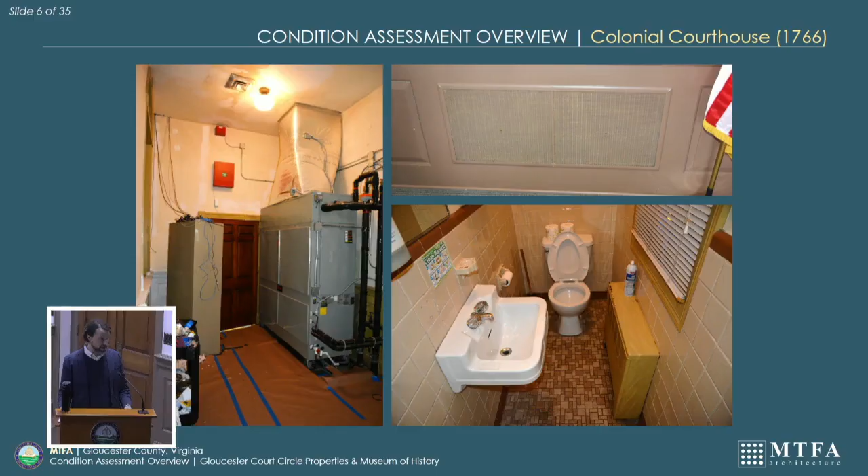And then the big question, which I've kind of hinted at, is what period does this building want to be restored to in a future renovation or restoration? We've had lots of debate. It's called the Colonial Courthouse, but there were serious major renovation periods that in some ways have removed significant aspects of that colonial fabric. So really much of what we see is a combination of 1766, 1907, and 1956. And so there's a series of decisions that need to be made about how far back this goes.

One of the biggest ones is simply the arrangement of the building. If you see this series of floor plans from the different periods, drawn by architects at Colonial Williamsburg, in the first period the building was originally arranged in a traditional parti or plan, where when you entered the courthouse, the judge would be immediately in front of you. The 1907 arrangement reoriented the courthouse to become lateral, so now the judge is to the right.

And then the 1956 renovation removed the dais and flipped the dais to this side. And so there's a series of questions about that. Obviously, you've got the 1907 ceiling, you've got the 1907 portico.

So really, there's a complex web of questions about when a big restoration happens to this building or a big investment happens to this building, even if it's not solely focused on restoration, those questions still need to be asked so that work that's being done doesn't require undoing in the future, but is really conducive to future work that you can build on.

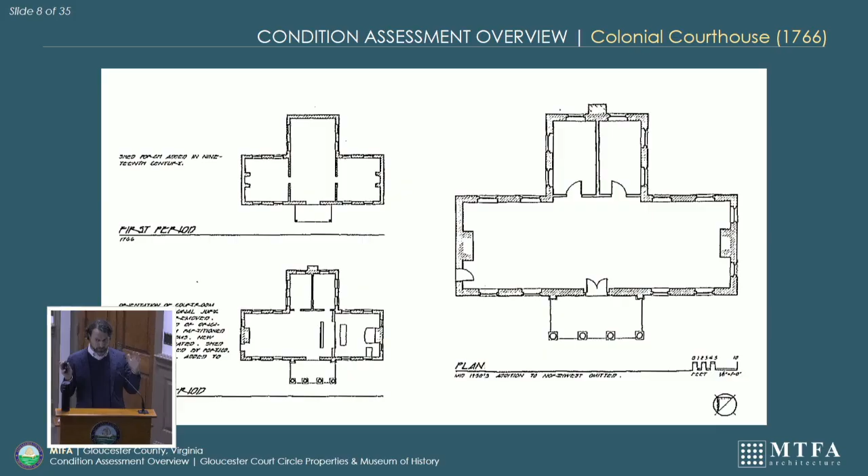And so that's a key point of how we like to think, is that if we make a recommendation, it can be built upon. It doesn't need to be undone in future work. That's a big thing, so that you're spending the money efficiently and effectively for the future.

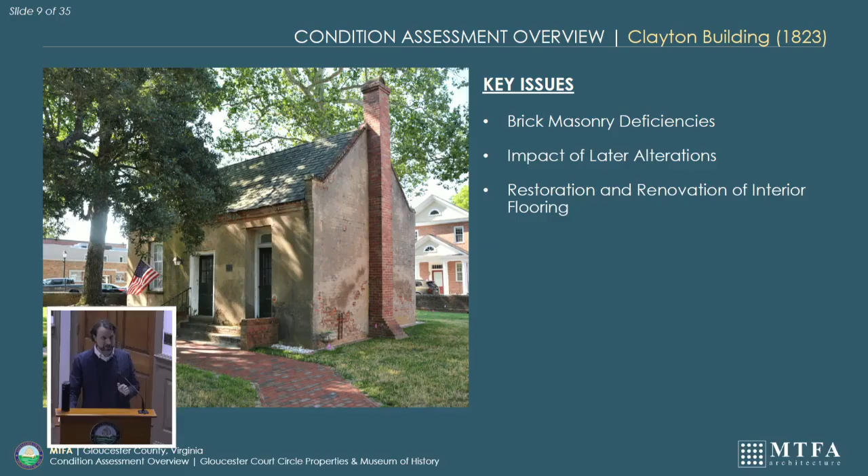Looking at the Clayton building from 1823, it was a clerk's office originally. It's got a really interesting attic floor. It actually was fireproof, so you've actually got 2 courses of brick on that attic floor. It's one of the several fireproofed attics that you have in this circle here. Here, key issues are brick masonry deficiencies, impact of later alterations, and then restoration and renovation of the interior flooring.

Starting with the brick, repairing the brick is really complicated by the application in the 20th century of what we believe to be a Portland cement-based stucco. And so a Portland cement-based stucco does not allow the masonry to breathe again, so that's trapping moisture and is creating some of the damage that we see. So you can see cracking in the image on the left along the corner. That's really to be expected as a building moves, that cracks happen at corners and at window heads, like you see in the image on the lower right, window and door heads.

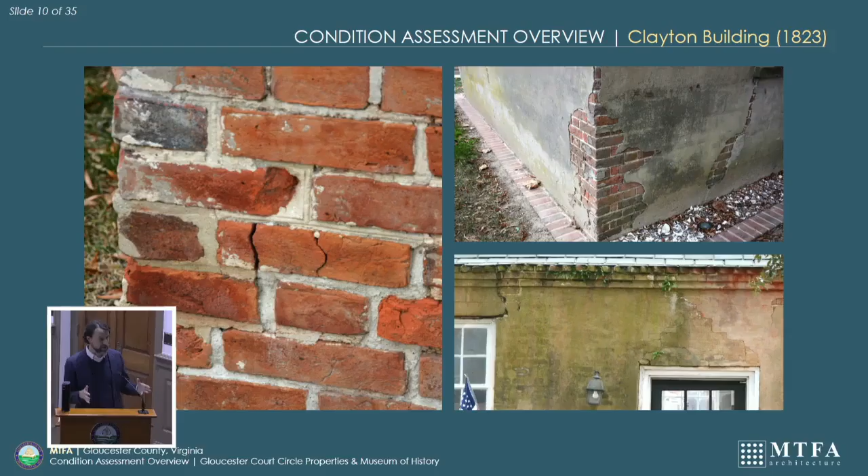And then you can see in the image on the upper right how this stucco is starting to fall off, but one of the challenges is you can't just go and rip this off. This will rip the face of the brick off if you try to take it off mechanically without extreme care. And so we don't want to do that, because that will affect the porosity of that wall, likely creating a lot of damage to the interior plaster.

Again, later alterations are a big thing. And again, that's why we're trying to do work that is conducive to both preservation but can be built upon in our recommendations. So you see here in the image on the left, really 2 big later alterations that are featured, which is the application of the stucco and then the construction of that brick chimney, which is no longer used. And then the image in the middle, you can see the faux slate shingles that were installed, essentially creating a mismatch with the natural slate shingles that are on 3 of the other buildings.

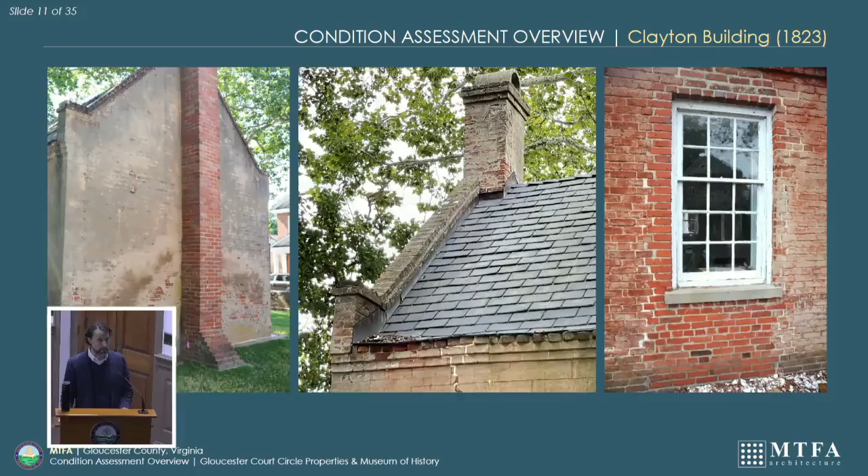And then the image on the right is the rear of the building. You can see the coating that's on the walls, that kind of gray to the sides of the image. And then you can see the cast stone sills, but also just sort of the mismatched nature of some of these alterations over time.

And then on the interior, the image on the right is this beautiful stone floor that's historic to the building. And then you've got brick floor that's in the left-hand, or I guess if you're looking at the front of the building, the right-hand room, but in the left-hand image. And then that was obscured for a period of time. You can see the level of the paint on the base trim in the image on the left.

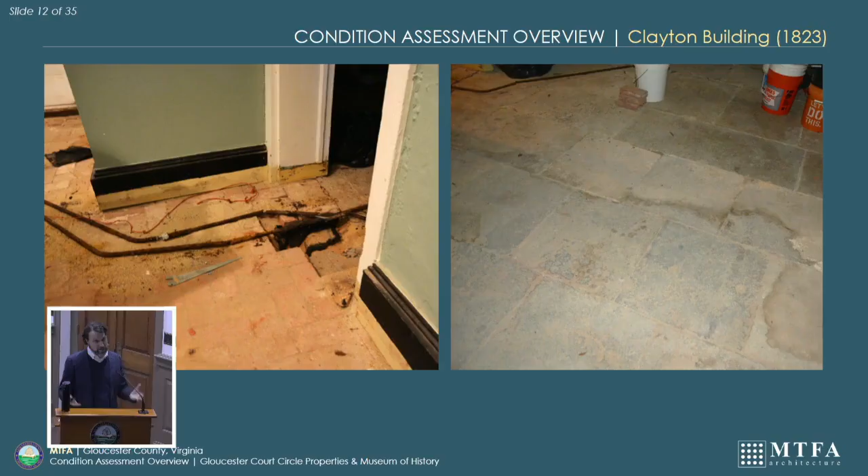So conduit is actually now currently running on top of the floor, creating a hazard really to being able to use the building in its current arrangement. So there's some big questions about how to manage that. And then that stone floor itself also needs attention because of some of the moisture that's coming up through the floor.

Moving on to the Roane building, another clerk's office. This one built in 1896 by the most prolific public builder in Virginia's history, B.F. Smith Fireproof Construction Company. He did several courthouses, many clerk's offices, many jails throughout the state. He was a very effective salesman.

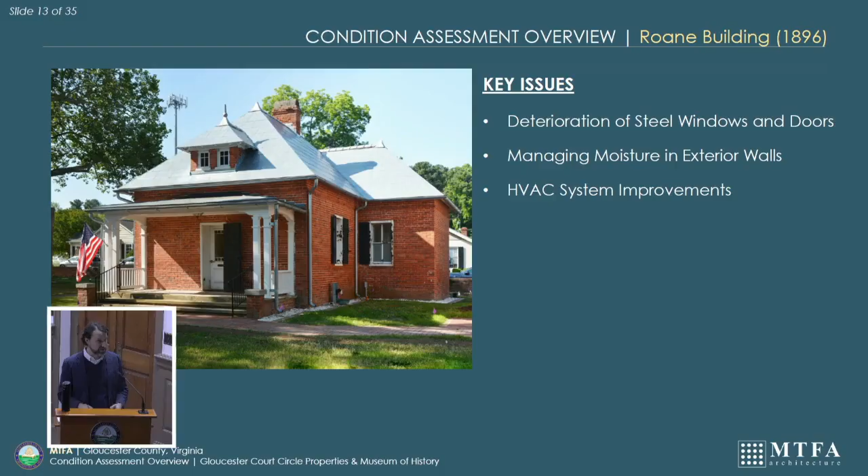Key issues here are the deterioration of the steel windows and doors. As I joked while we were out there earlier, Wes's good work painting the windows recently is really hiding a lot of corrosion and a lot of deterioration. Also managing the moisture in the exterior walls, and then HVAC system improvements. So these are images before it was painted.

These steel windows are really unique. The double hung, meaning sash windows like you have here, made out of steel, only were built for a very small period. They quickly moved to casement windows because steel windows don't work as well as wood. They don't have the give. You essentially have an extremely hard material against another extremely hard material, whereas wood has a little play and can fit well with one another.

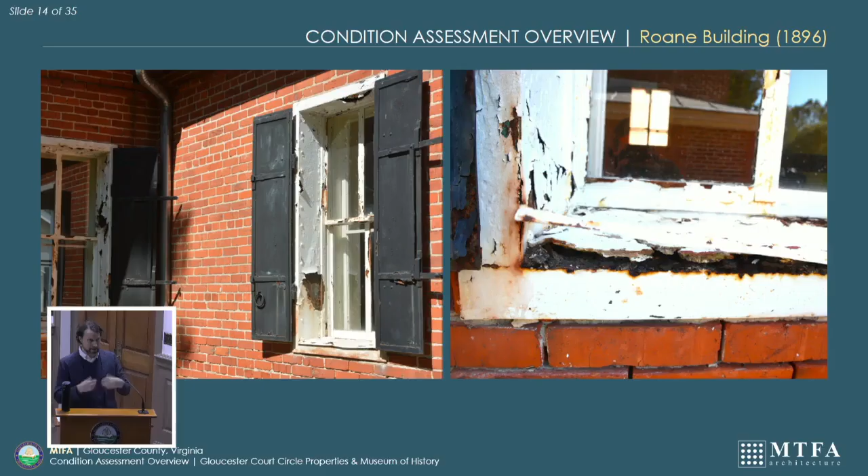So you've got a really unique, small, limited period that these types of windows were actually executed. So losing them would be a real shame from a preservation standpoint. They also have these beautiful shutters. All of these contributed to the fireproof nature of the building.

The moisture in the exterior walls is really compounded by the soils plus the nature of the exterior assembly. You've got a unique cavity wall in that building where you've actually got an interior cavity that is creating some of the problems that we see. It's allowing moisture to linger inside the wall. And so that is creating that mortar erosion and spalling of that brick right in the center of the image.

And so that tells you that the moisture is coming through that mortar and bringing it with it. It's constantly there. There's a real clear datum when you look at the exterior of that building where that moisture is rising to and then evaporating through the wall and damaging the wall as a result. And then you can see how, where it can, it's moving through the interior and deteriorating the plaster as well.

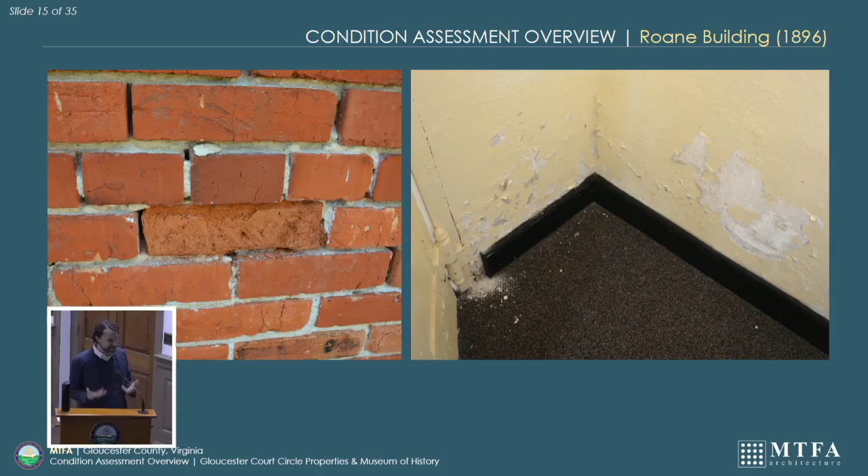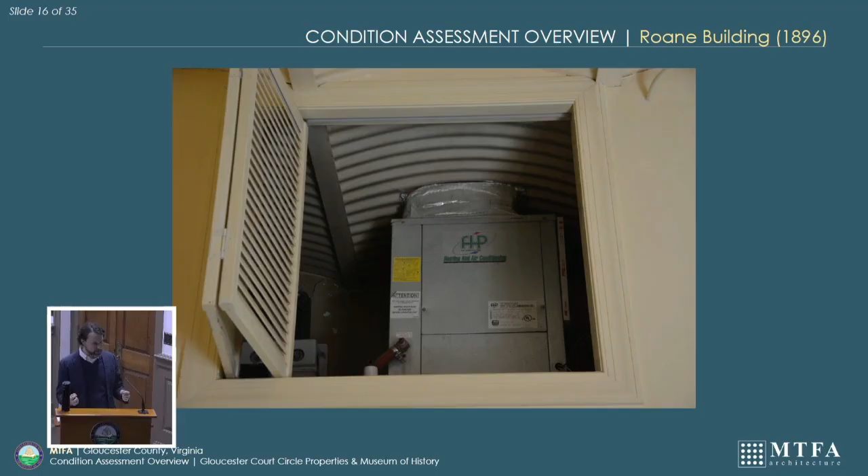Again, I should say this is compounded by its concrete floor. Concrete floors are bad for historic buildings. It's one of the things we always struggle with. And then the HVAC systems. So again, how can they help address this cavity situation where we're holding moisture, where we're not allowing the building to breathe? So that's another way. How can we control for humidity? It's really a challenge in a lot of these buildings.

Moving over to the old jail from 1873, we've got the exterior brick masonry repairs, window restoration and interior improvements. One thing I'll make a note of that I said outside is that for much of this building's history, it was painted white or whitewashed. So it really stood out from the other buildings.

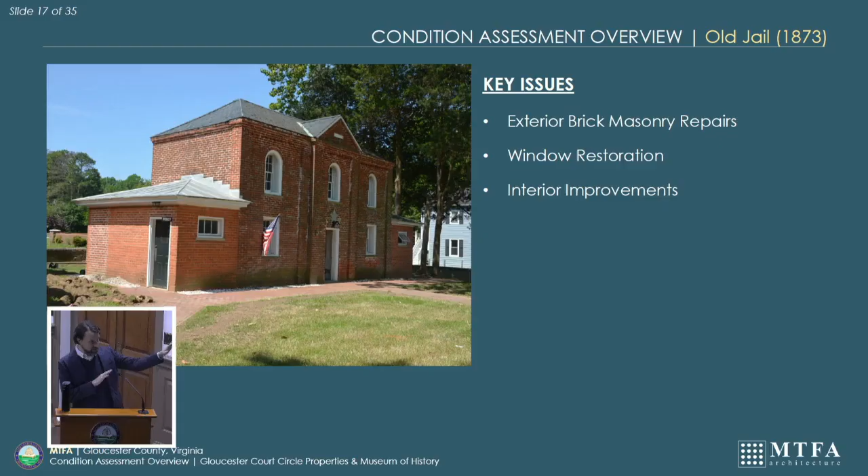And I also think part of that could have been, we see it often, so it's an educated assumption on my part, that it may have been painted as a result of the quality of the masonry, that the brick is lower quality and the paint helped limit water infiltration as a result. But it certainly, for much of its history, stood out as a unique building in Court Circle as a totally white building.

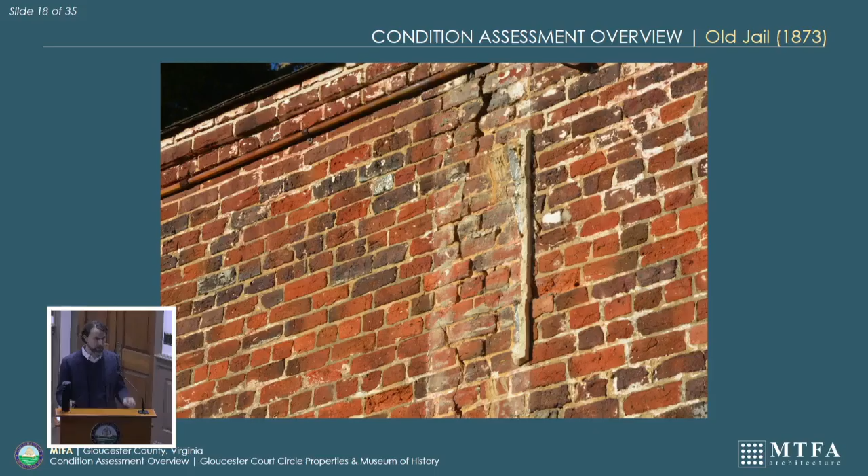Some of the brick damage that we see, especially on the rear, we've got a serious vertical crack moving through the wall, demonstrating movement in that wall, and there's a number of other cracks, a number of spalled bricks as well. The windows, especially on the rear of the building, again, south-facing usually gets more issues because you get hot and cold, whereas the north has a more stable environment.

But that south-facing, those windows are in deleterious shape. You can see that wood is heavily rotted. The bottom rail of that window is toast. So those would need full restoration or sensitive, sympathetic replacement.

And then interior improvements. The image on the right shows the central stair, and you can see the evidence of a lot of the modern alterations that haven't been fully removed. And so I think the interior of the jail really needs to be augmented by that master plan. How does this building want to be used? What purpose can it serve? Is it going to be interpreted? Is it going to be used in another way?

And that ultimately needs to be thought of holistically, all of these buildings together, so that you can spend your money effectively and efficiently. And then the image on the left shows the public restrooms, which are certainly showing their wear and tear and their age.

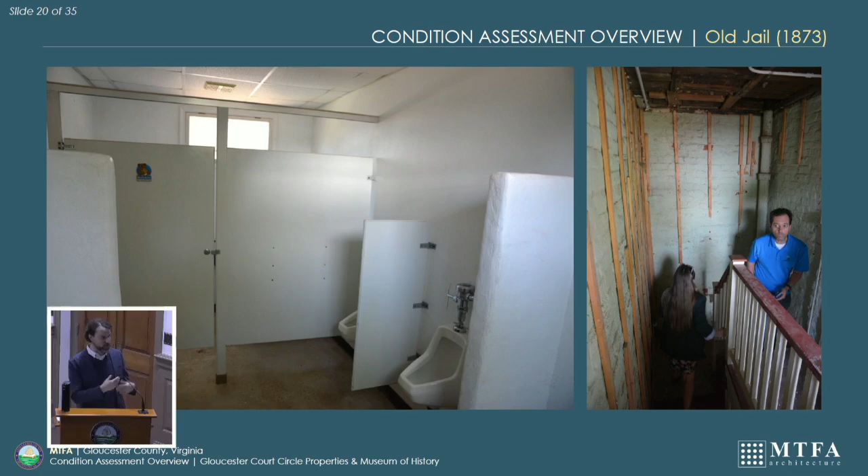Moving over to the debtor's prison from 1824. This one has one of the more concerning conditions, which is the first bullet here, which is the displacement of the northwest corner, brick masonry deficiencies generally, and then looking at some limited interior improvements.

As I said out there, sorry to keep repeating that, but I believe this might be, if you will, the newest debtor's prison in the state of Virginia. I think this was one of the last ones built. The law soon changed about a decade after this, where people stopped imprisoning debtors. But anyway, it stands as a really unique one, and there's some really interesting comparisons to other ones, say in Northampton County, which has a very similar finished interior.

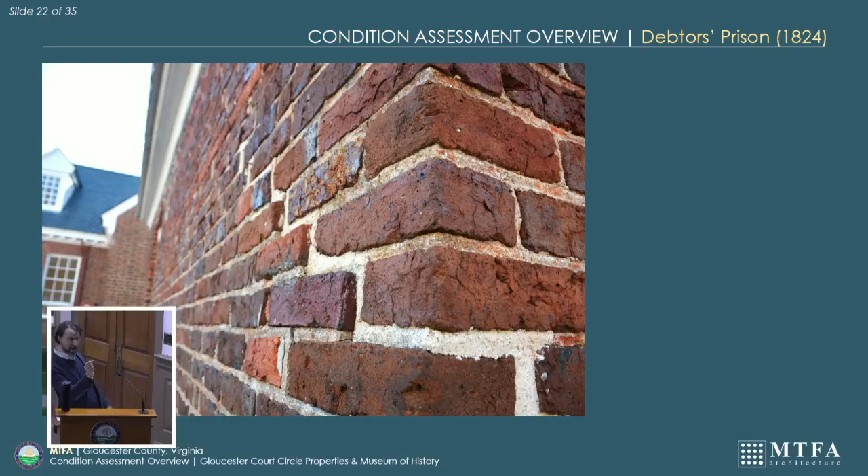Here's an image of that displacement. I don't know how clear it is, but it's pretty easy if you go over there and look. You can see how really what's happening is that corner is starting to turn away from itself, and you can see you've got about a 3/4 inch to an inch ledge where that's moved. That's highly concerning. So what that's telling you is that the building is not stable and that it is actively moving.

So as a part of the most recent investigative efforts, we did a test pit to observe the foundation condition and arrangement, and then we looked at also the soils conditions and did a geotechnical boring. And what we found is that the building doesn't have a footing, which is normal and to be expected for a historic building. Simply the brick walls go down about 18 inches below grade and stop. So they don't have a traditional spread footing, which really helps spread out all that weight and help float on that soil.

And what we found in the soils was that it sits on about 2 feet of topsoil and then about 7.5 feet of organic fill. So that tells us of some activity there, either preparing the site to sort of create a level, or perhaps it was a landfill, as we talked about earlier. But what ultimately that means is that soil is decomposing and will continue to move. So in order to stabilize that corner, you have got to get past that about 10 feet to stabilize that wall so that it stops moving.

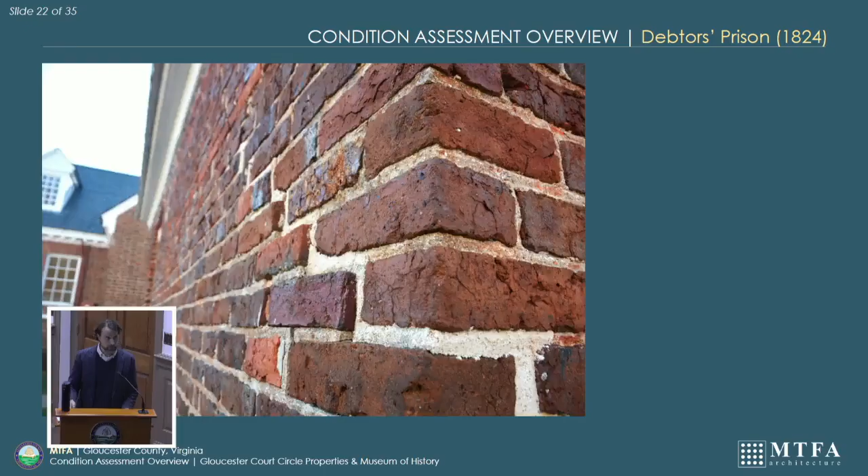Other masonry issues, you can see heavy mortar erosion on the chimney there. Moisture gets in through that mortar loss, and that was actually the site of some heavy carpenter ant activity when we were on site, and that has been addressed by county public works staff. But when you get water in, water's your enemy, right? If water's getting in, that's going to either attract bugs, rot, or other damage.

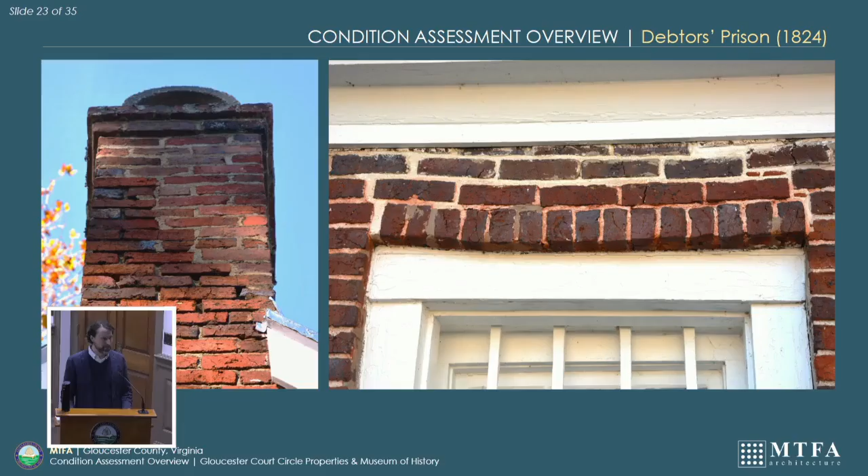And then the image on the right shows the lintel. The brick is not stable and actually is sagging as it spans that window. It's really relying on that wood frame to help span it. But you can see the movement in that brick there.

And then just to look at the interior, this building offers the most immediate opportunity for interpretive potential to really access and tell the story of what it was like to be imprisoned as a debtor. And there's really only limited improvements such as removing modern alterations, but really it's a pretty effective space. You get the sense of that heavy wood plank. There's sort of a wood frame building inside this brick building that was really used to create a secure place to hold prisoners.

Moving on to the Confederate monument from 1889. This is a pretty traditional location for a Confederate monument. Usually they were placed in courthouses or in cemeteries with Confederate soldiers. Key issues here is the appearance of the base, stone masonry repointing, cleaning, and looking at installing an interpretive sign. So these are all in the same image here because the issues are relatively minor for this small piece.

You can see that base, it's kind of blown out in that image, but you can see that it looks cracked, it looks scary, right? It looks like it's unstable. Ultimately, that part of the monument was always intended to be below grade. There was a raised planting bed and then an iron fence around the monument originally, and when the ADA alterations to create a level, accessible path throughout Court Circle were installed, that actually pushed the grade down, exposing that base, which wasn't intended to be exposed. And then you can see there's small areas of mortar loss, and also the green biological staining in the center image there.

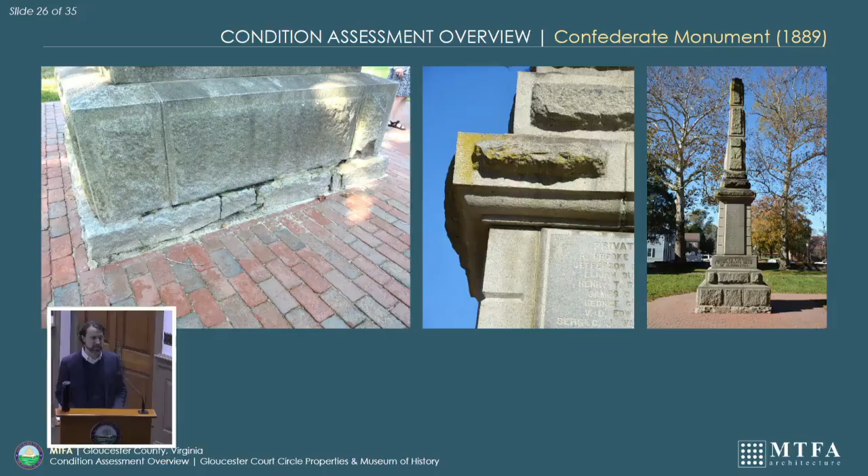And then talking with Robert, I know this is a big site here to come and speak about. It's a great opportunity to interpret history, both the Civil War and the years after, when it was installed. It's rife with opportunity. It's also a nice spot to put an interpretive sign to help lay out who built this, why did they build it, all of those things, that could be installed in front of the monument.

Looking at the annex from 1957, it's in good shape. So these issues are not particularly significant. The biggest ticket is really going to be a building systems upgrade, which you would expect in any building every 15 to 20 years. But looking at that courthouse restroom that's just right off the breezeway there, making that more safe because you've got that ramp, so it's a tripping hazard. It's also not up to code.

And then looking at the second floor offices. So I've kind of combined all these. You can see how that ramp gets in the way of the doorway, creating a potential tripping hazard. In the event of egress, it's not, I would call, a safe arrangement. And then the offices generally just need a refresh plus systems improvement, again, like you'd expect to upgrade any modern building. Moving on to the surrounding landscape around the Court Circle. Generally, it's in good shape.

I mean, the main thing is stopping people from hitting the wall with their trucks and cars, right? That's one of the biggest things. And so, we suggested perhaps the targeted installation of bollards to help that, as well as just general maintenance of the wall, removing biological growth, meaning like the moss or the green growth that you see on the wall. And then also just general repointing, doing it the right way, using the right kind of mortar to protect the

bricks. You want the bricks to be harder than the mortar, right? So the mortar is the sacrificial piece. The bricks you don't want to break because then they're much harder and more costly to replace. Otherwise, maintaining the trees, you've got a lot of big, beautiful trees, keeping them in good health is really important to the beauty of Court Circle, and then also making sure that their root beds don't disturb the foundations of the buildings and create further damage.

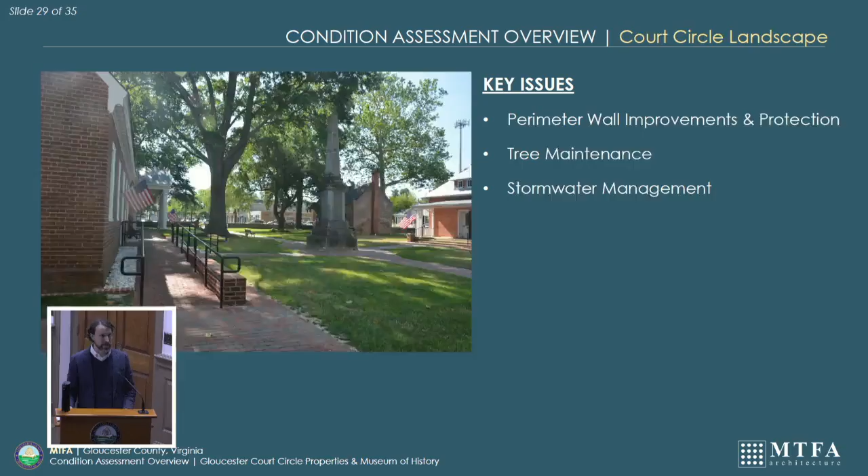Moving across the street over to the 1770 Botetourt building, the foremost architectural historian on Virginia courthouses called this the best preserved colonial tavern in the state. So it really is a jewel. Over history, there's been a number of additions. And what's so beautiful about the restoration effort is you don't really see those, especially from the front, right? Main Street, it was really returned to its original colonial appearance.

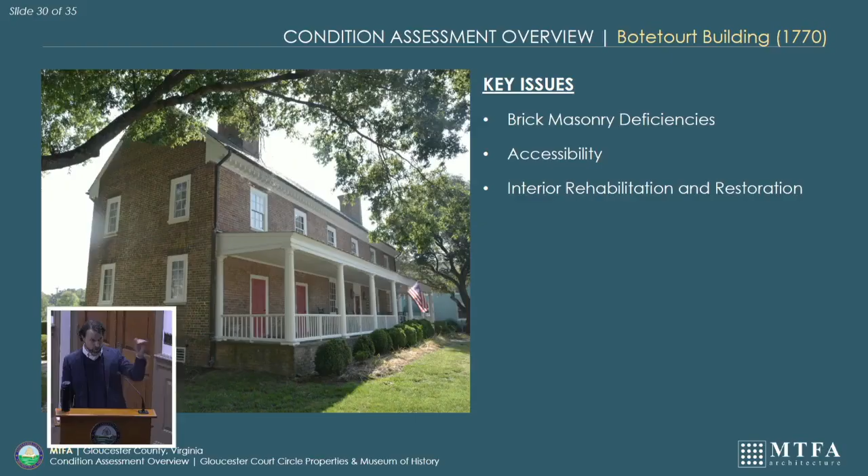However, on the rear, we do really see that, and that's really our first item there, the brick masonry deficiencies. Off to the rear, there were a number of additions over time that have since been infilled and repaired, as well as off to the side. And you see some of the perhaps not longest lasting design decisions that were made in those previous projects. Accessibility is another major item here, both getting to the porch, but also getting downstairs, and then just generally interior rehabilitation and restoration.

So looking at the brick here, you can see some of these repairs, mismatched bricks, cracks moving up, bricks being infilled that aren't the right size. That's on the left-hand image. And then on the right-hand image, you can see what I call kind of a cheat of a detail, where they wanted to install these lintels, but they wanted to hide them. And so what they tried to do was install very thin brick units, but of course now those have popped off because they aren't really set into the wall sufficiently. So they've become displaced, and you can see that dark thing just extending past the right-hand side of that window.

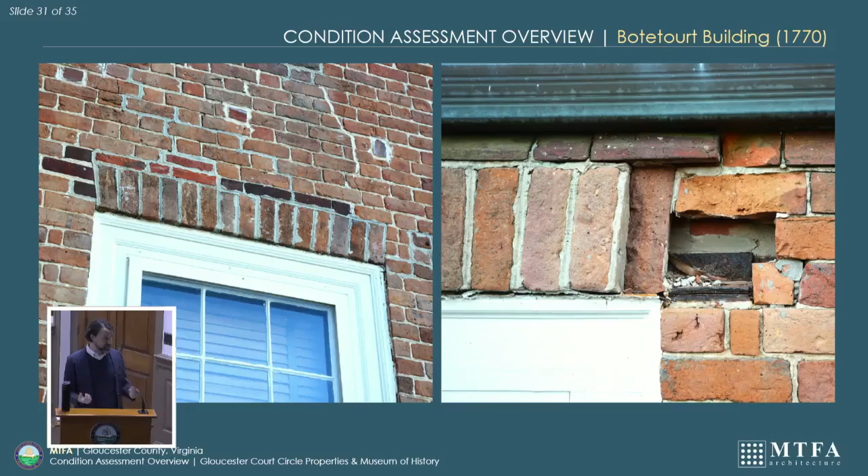That's a steel lintel that is heavily corroded and jacked. So when we say jacked, that means the corrosion has gotten to the point that the structure of it has actually expanded. And so that's a major concern in a brick wall, because as that jacks and expands, then all the brick is affected, starts to crack, get displaced, and could really lead to serious structural issues around your openings.

Accessibility, I know there was talk in the plans initially about looking at a ramp on this side. I know now a chairlift is going on the other side to be able to get to the first floor. Obviously, even if we get to the first floor, there's no accessibility to the second floor. And then also the rear sunken garden is inaccessible as well. So that severely limits full access to people to your major museum site. And so I think it's an important thing to consider in the future, how that can be improved.

Looking at other interior work, obviously as you enter the first floor, you do not get the feel of a colonial tavern. You see the modern carpet, you see the modern suspended ceiling. So, can there be a long-term project that pursues grants, that really maximizes this historic resource in a way that evokes that feeling, now that the second floor so thoroughly gives you that feel of a colonial tavern. It's really beautiful up there, and the new exhibits are really fantastic.

Other issues down in the basement where we've got moisture infiltration, water coming into the building, just general issues around what is really that basement going to be used for. I know there's a number of artifacts down there. Again, all of this goes back to that master plan. What is the vision? How much are you really seeking to bite off, and how can you do it in a sustainable, effective, efficient way?

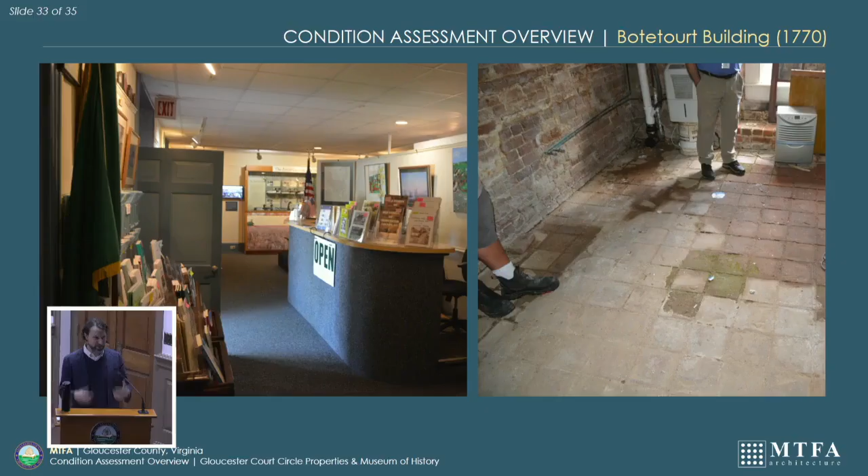And then generally the landscape surrounding that. The rear sunken garden is a modern addition. There was no sunken garden historically behind the tavern. What it allowed is to really submerge and hide that mechanical and restroom addition that was added to the back of the building. It creates kind of a serene space, but it's clearly lightly used and is really kind of

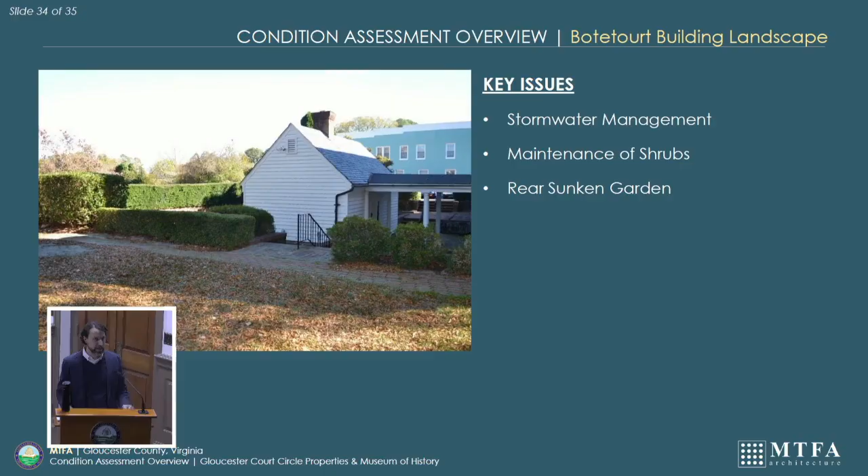not a focus. Managing stormwater, both how it affects the basement level in particular, but just generally around the building. How can we get that stormwater away from the building and protect it, and then just maintaining shrubs around it. So that's kind of going through the buildings itself. I could go on and on.

Our draft report is about 320 pages, so we are deep into this. So I'm not trying to bore you with all of that, but this is thorough work. We love doing this. We're really passionate about it. This is what we do. And really being able to encounter these buildings and grapple with the challenges and problems has been a real pleasure. And I hope that this report can serve for the next 10, 20 years.

And really, again, our focus is going to be on establishing priorities so that the most important work can be done first, and then that can be augmented by that long-term vision of the master plan. So with that, I'd be delighted to take questions, and I'm happy to continue to expound.

Dr. Orth. Yeah, thank you for the presentation, and I'm sorry that I missed the tour because of whatever happened to me. But now you mentioned a couple of really unique things about what's here in Gloucester at the Court Circle, but it also, to me, brings to focus a lot of the interesting things of historical significance in Gloucester itself. And we're the stepchild of that historic triangle.